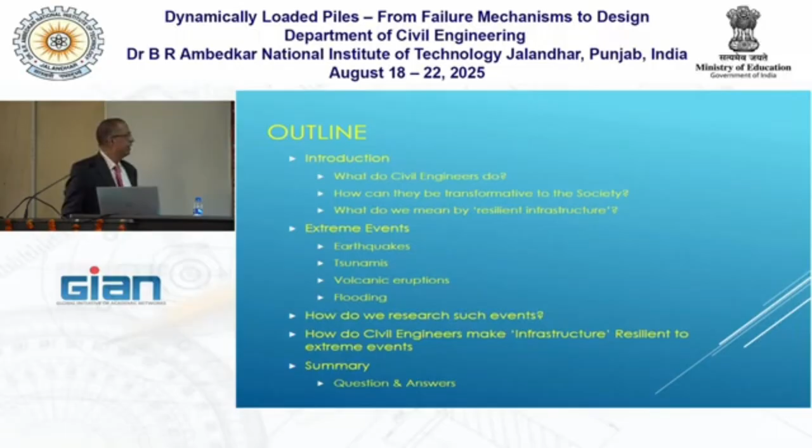And what do we mean by resilient infrastructure? We take the definition of resilient infrastructure as that which can withstand extreme events, for example earthquakes, tsunamis, volcanic eruptions, flooding. And I'll show some examples of each of these.

More importantly, if I want to study these kinds of extreme load events, how do I go about doing research? These are extreme events, so they're not going to happen every day for me to instrument a building and see how it performs or do things like that. So we need to have some research strategy. And once you're able to create that, how do engineers then go about creating some infrastructure that is resilient to these extreme events?

And then I'll try to summarize, and I'll be happy to answer questions. I've been teaching for the last 35 years now, so at any point if you feel unsure what he's on about, put your hand up and ask me. That won't throw me off my lecture, and I can always go back and restart where I left off. So feel free to do that at any point.

Some history. 200 years the Institution of Civil Engineers has been in existence in the UK. In 2018 we celebrated 200 years. Now it's been another 7 years, so it's 207 years to be up to date. There are a few key civil engineers who played a role, who actually never called themselves civil engineers, although they founded the Institution of Civil Engineers.

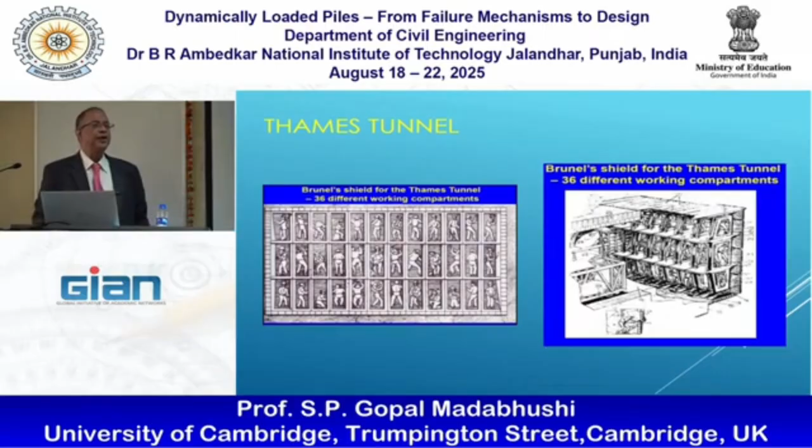Then the tunnel finished, and nobody was using it because they could see the entrance was on the left bank of the River Thames, and the exit was on the other side. So they knew it went through, but they also knew it was going underwater. They thought, oh, this might all leak water at some point and we'll all get drowned. So nobody was using the tunnel.

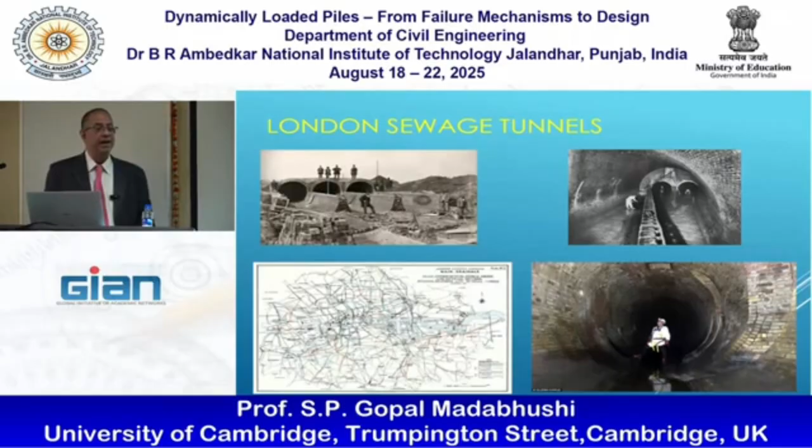Anyhow, this man did the London tunnels. As I said, they're still operational, and the network is quite vast. This is the map of London, where he managed to get the sewer water out of London into the Thames using these tunnels.

So those were the challenges in 1800, right? Old tunnels for transportation of people, water, and sewage. And as a result, London continued to grow, and in fact it's still growing today. About 20% of the UK population lives in and around what we call the Greater London area, that is, 1 in 5 British people lives in London. The rest of the country is only vastly spread out.

In Scotland, which has more than maybe 40% of the land area, the population is something like 6.5 million. So it's really sparsely populated, and it's also very cold up there.

Now our challenges have changed compared to the 1800s. Now we have to do things against the backdrop of climate change, rising water tables, and other risks, some of which I will talk about. So modern civil engineers need to innovate in delivering the solutions that are required today. This infrastructure that we need today is very different from what was needed back in the 1800s.

So I'm going to pick a couple of examples of more recent projects in London again. This one is called Crossrail. Crossrail basically was...

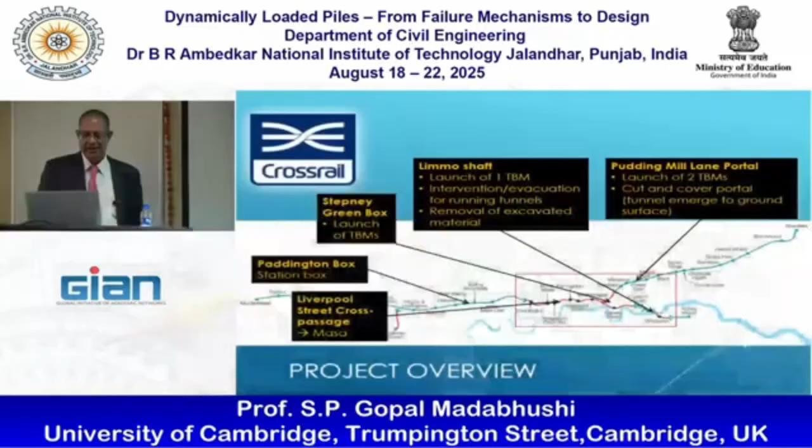So they had some shafts at Bond Street and other places—I'm not going to focus too much on that. This Pudding Mill Lane portal is the important one, and they had to put shafts here. Forget the place names, I'm going to show you.

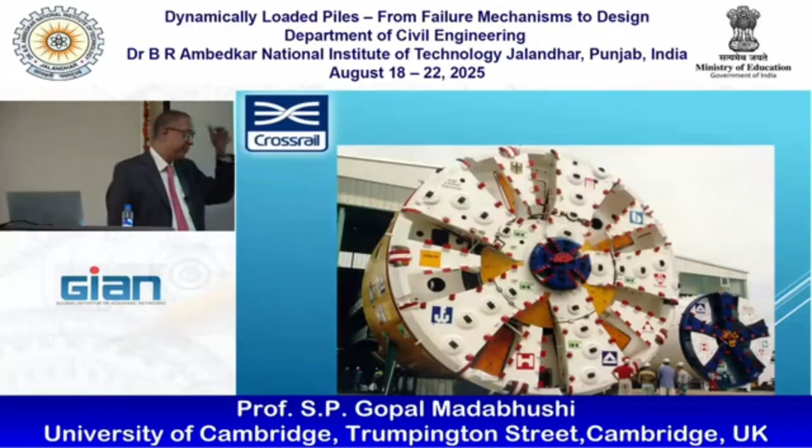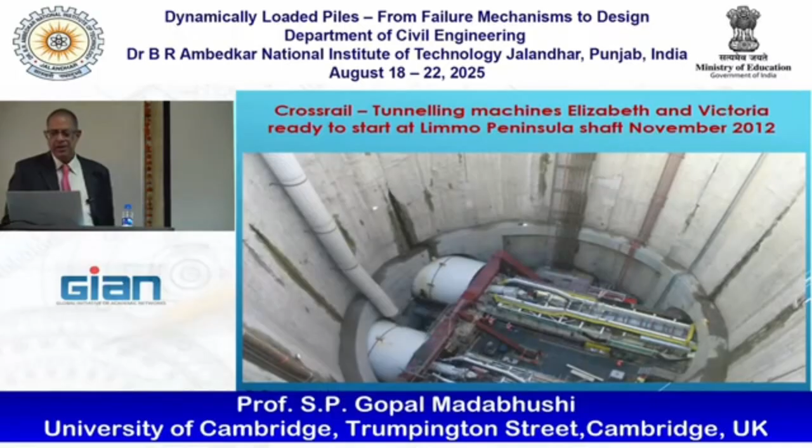So this whole EPB, the earth pressure balancing machine, is a fairly complicated beast, and it needs to be lowered into the ground. You take this and lower it into the shaft, as you can see here, and they land at the base, and then they can start tunneling horizontally to create the tunnel itself. You also line the tunnel as the tunneling machine goes. There are two machines—one is called Elizabeth, the other is called Victoria, which started doing this.

This is a very old slide from my colleague and former professor, Robert Mair, who looked at this tunnel collapse mechanism—I think he did his PhD on it in 1974 or so. As a result of this one slide, he became very famous, started his own company called GCG, and they are the consultants worldwide now for anyone who wants to make a tunnel or has problems with tunnels—they go to GCG in London, which he owns. So this is a very powerful slide; what he put in his PhD thesis made his career lifelong.

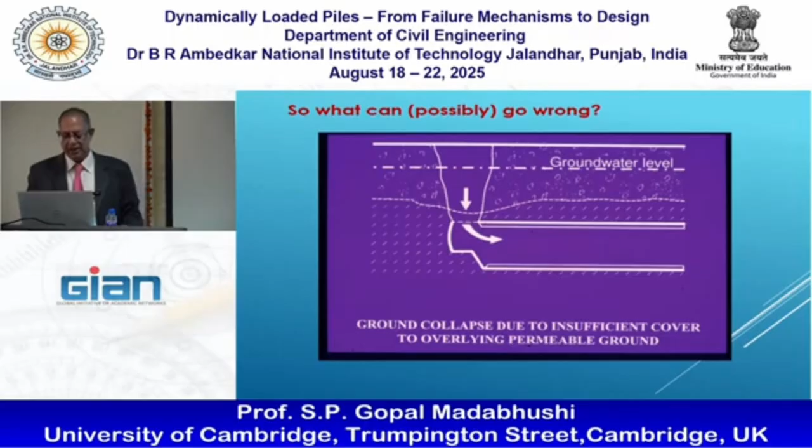So this ground collapse is a very big problem, especially when the tunnel is shallow. Deep tunnels are generally safer than shallow tunnels. And this isn't just an experiment—things like this happen in reality too. This is in Munich, I think, where this kind of sinkhole opened up while a bus was going by. Suddenly the ground opened, and the bus fell in, because they were trying to tunnel underneath, and the whole ground collapsed into the opening the tunnel created.

It's not just limited to the Germans - we have our share of disasters. This tunnel collapse happened when the Heathrow Express line was being built. The only thing that was funny about this tunnel collapse is the porta cabins you see there belong to a company called Balfour Beatty.

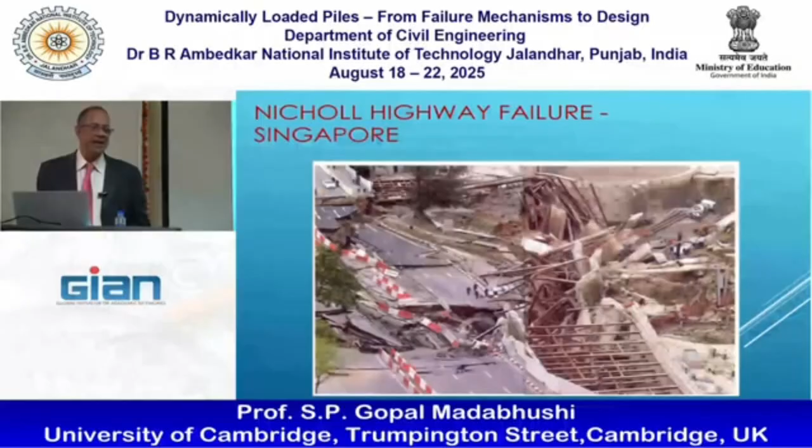Luckily, casualties were less, but Singaporeans are very, very strict about health and safety, so this went up to the highest levels in Singapore government. Robert Mair, the GCG, were consultants looking at the collapse - he was on the committee. But really, if you don't understand the mechanics of the soil properly, things like this can happen.

Okay, those are the bad things. What can we actually do? I'm going to give you an example of the Jubilee line extension, which happened maybe 10, 12 years ago now. And this picture you should recognize - this is Big Ben, and this is our parliament, the British parliament.

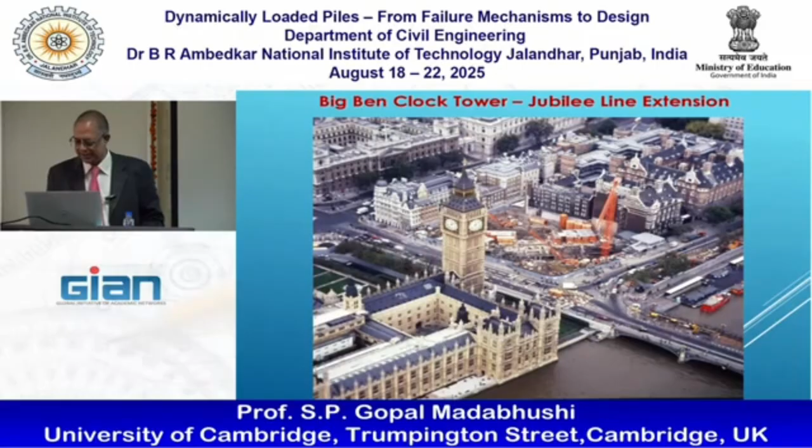So opposite this, they wanted to create a new station - the Jubilee line runs underground below. This is the River Thames, and the line runs in that direction, and the station is just here. If you go now, the construction is obviously finished long ago, but they left the props in place and you can still see them - they made it part of the architecture. Normally you take props off after construction, but in this case they made it part of the design.

So, before they started constructing this, the companies which were in charge of design and build had to sign a contract with their names on it that the settlement...

...tunnel may give Big Ben that Pisa tilt. Everybody knows what the Leaning Tower of Pisa is, and they started publishing this - the Evening Standard, which is a kind of slightly tabloidish newspaper, put that next to Big Ben and said, 'Oh, it's all going to go tilty.'

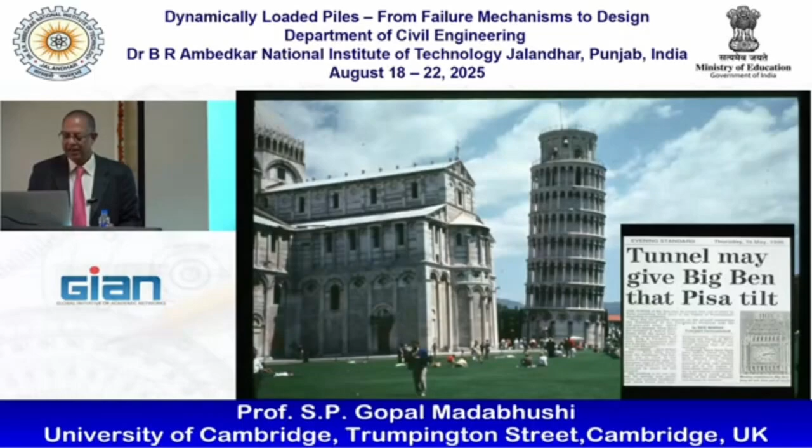What they came up with is this tube a manchette technique, where you make a shallow hole in the ground and inject tubes across and pump grout. The idea is, as they observe the tower, as soon as it starts to show some settlement, you pump grout at high pressure to hold it in place and stiffen up the clay. The actual tunnel goes somewhere below, so you need to inject this grout layer between the tunnel and the structure you're trying to protect. That is the plan.

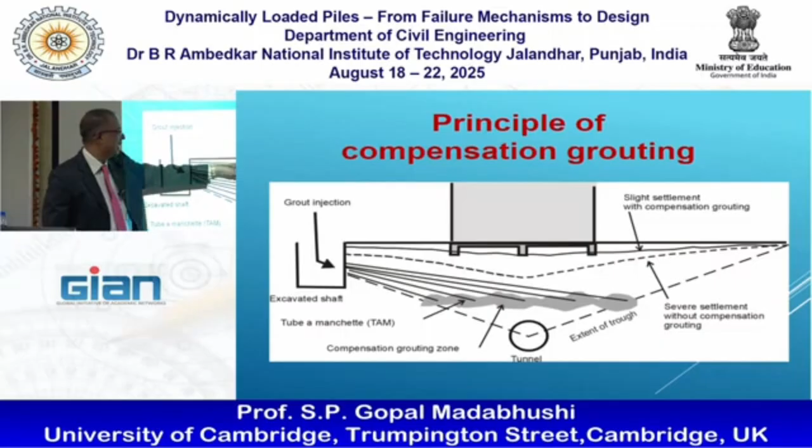And the expected settlement was basically at this level, whereas the severe settlement without any compensation grouting is at this level, and this is not acceptable.

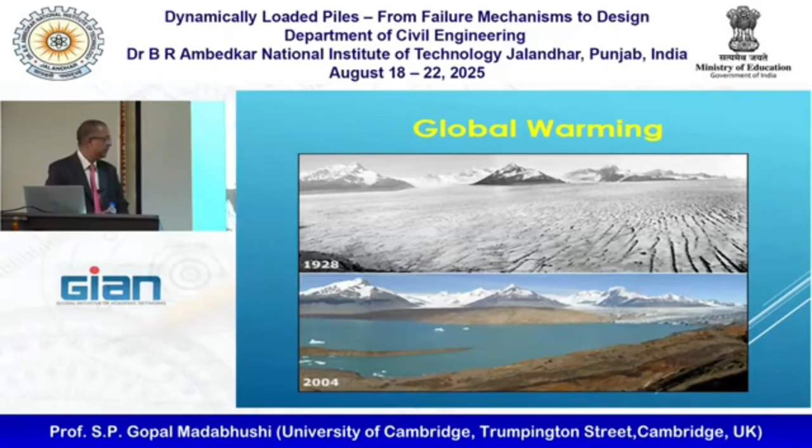You have mining issues like open channel mining, which you can see clearly - things like California mining waste being transported, and so on. So all these are engineering challenges.

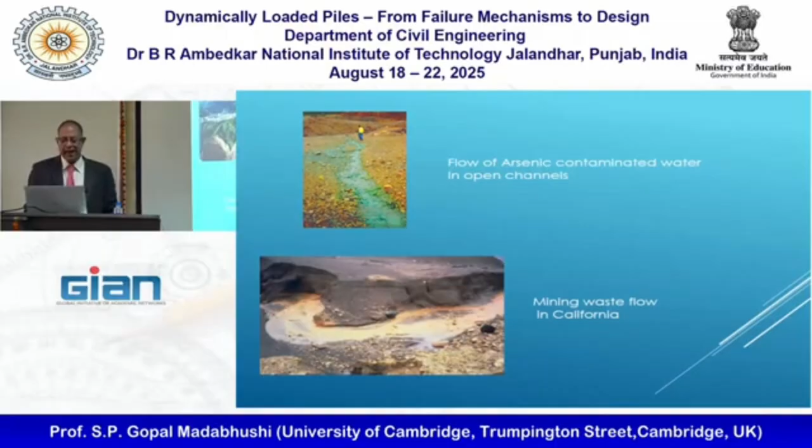And if you think that civil engineers have no role to play anymore because we know how to make concrete, I'm afraid you're sadly mistaken. Because making concrete is not the issue - solving problems is the issue, and problems are continuously changing. That is the main point I wanted to make.

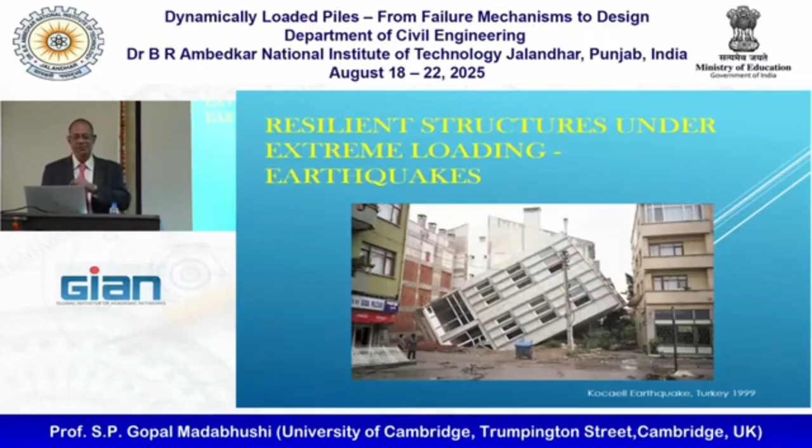Now I move on to a little bit closer to what we will be talking about in this course on resilient structures against earthquakes. This is a building that has perfect structural engineering. Senthil Sab has done a great design. No problem with the structure, right? However, the whole building is now on its side because the foundation has liquefied and the whole thing has fallen. Nobody is going to use the structure. No point how well you make the structure if it is going to be at a 60-degree angle to the ground. So, in the end, the structural engineer will always blame the geotechnical engineer and say you guys don't know what you're doing. And there's some truth in that.

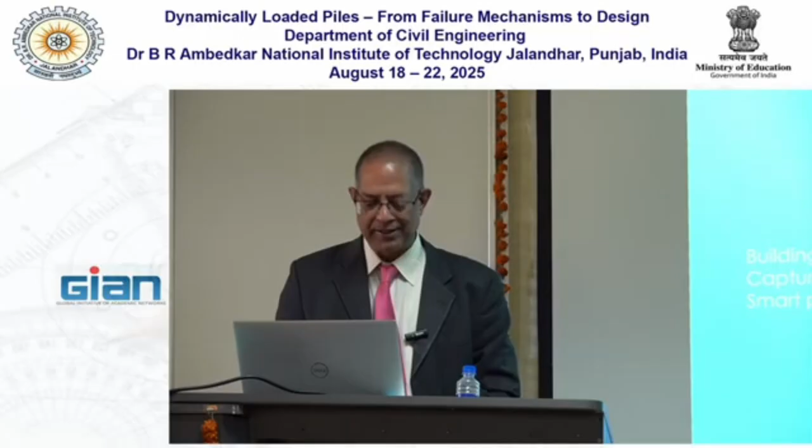I hope this place... now with the advent of, I mean, we used to go on site visits and see things like that, but now so many mobile phones are there, and you get images like this. This is the Mexico City earthquake in 2017. People are still there, feeling the shaking, and the building collapsed right next to them. So now we are getting to see actual failures happening almost in real time.

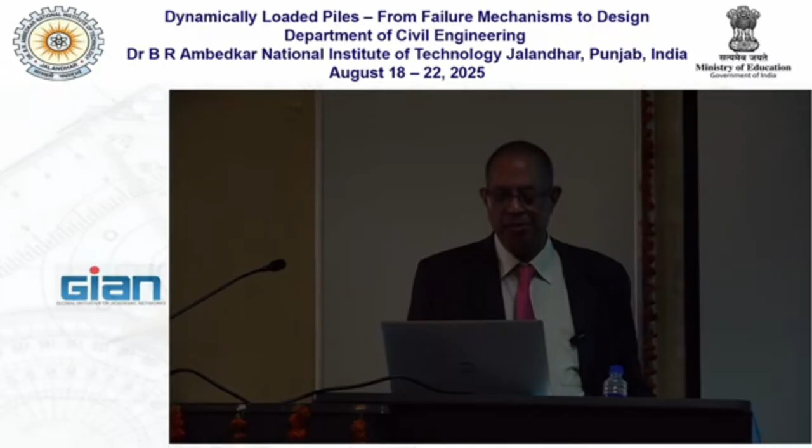Now we'll try to steer you more towards soil liquefaction. I'm going to try and keep it as simple as possible to start with. What is soil liquefaction, right? As an undergraduate, we all would have done this shear box experiment. It's almost the first or second lab you would do in any course.

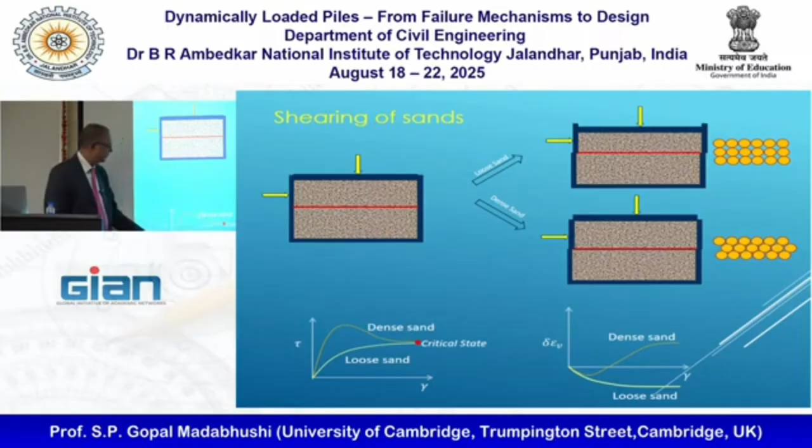Contract, dense and dilate - how does that manifest? If I were to plot the shear stress and shear strain, the dense sand will come to some peak strength and it will strain soften to get to the critical state. The loose sand, on the other hand, will constantly increase in stiffness and reach the same critical state. This critical state is a Cambridge construct, where we say that if you shear anything long enough, or enough shear strain is applied, all soils will reach this magic state called critical state, beyond which you cannot have any more increase in your shear stress. I can keep increasing the strain, both these lines will go horizontal. This is exactly the same as what structures people do in plasticity. Once you've reached your plastic limit, you assume you're not going to get any more increase in strength, only you accumulate more deformation. It's the same concept.

You can also look at this from a volume perspective. This is the volumetric strain, and as I apply the shear strain, dense sand initially contracts a little and then goes up, whereas the loose sand continues to contract. So the dilation is marked positive on that axis. This is very straightforward, and you must have done this kind of experiment before.

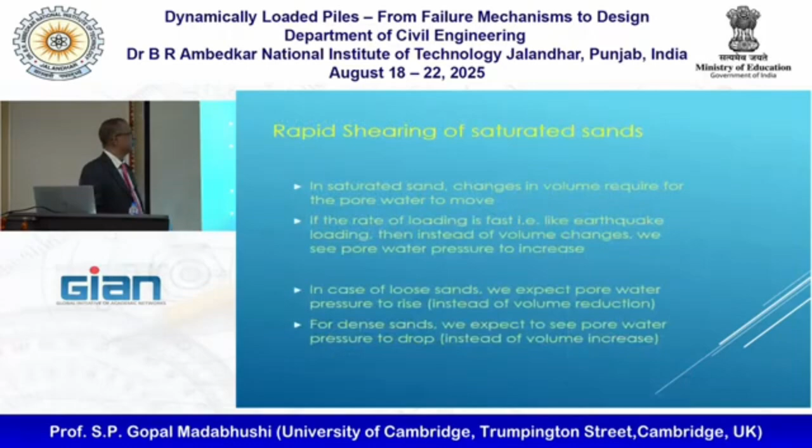What about saturated soils? When you have saturated soils and you're trying to shear them quickly, rapidly, your soil wants to undergo volume change, as we just saw. But for it to undergo volume change, the water between the pores needs to move out. So if I'm reducing my overall volume, the pressure in the pore water goes up, or the water has to flow out to keep the same pressure. If I am dense and I try to shear, the volume wants to increase, which means my pore water must go into suction, right?

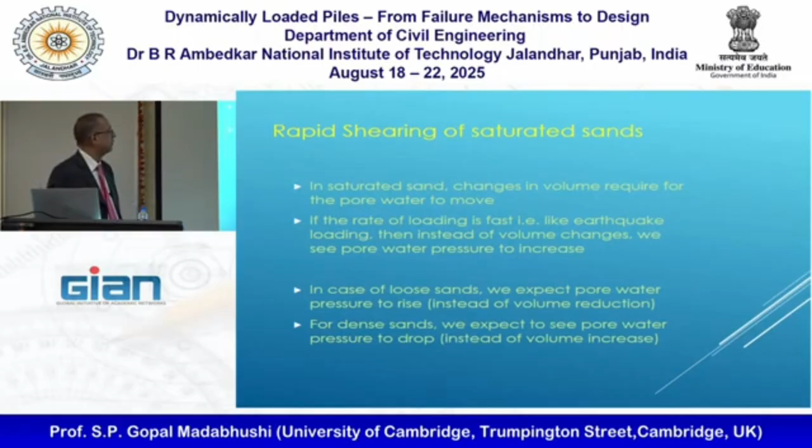So, loose sands, we expect an increase in pore pressure, and for dense sands, you see a drop in pore pressure. Very simple. When you try to do this kind of rapid shearing, I'm choosing rapid shearing because it's like an earthquake type load. You are applying 1 to 5 hertz. If you do that, there is no time for the pore fluid to go out, therefore the pore pressure will change.

Because everything in soil mechanics is linked to effective stress by Terzaghi's effective stress principle, if I change U, I will change my effective stress. If I change my effective stress, I'll change my soil strength, stiffness, the whole caboodle. This intergranular effective stress is the bit that allows you to carry loads, and if you mess around with that, that will change.

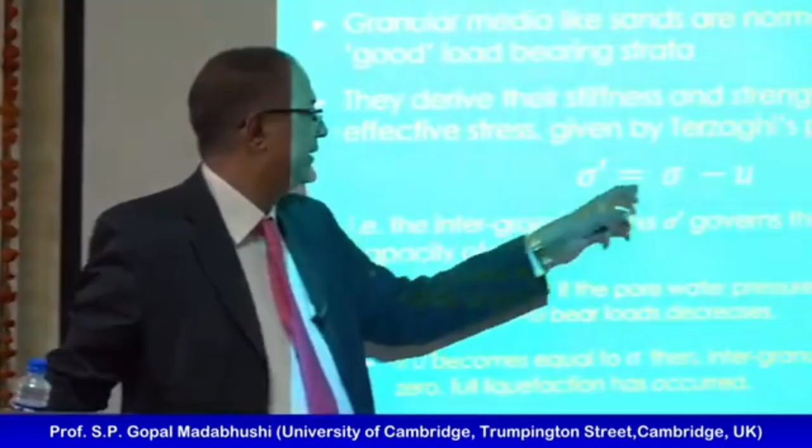So just to apply this, if my pore water pressure goes up, then my effective stress will come down, because the total stress is not changing. So if that number goes up, this comes down, and that's what you would normally call liquefaction. In fact, you can make the pore pressure U go up so much that it matches the total stress. If U equals sigma, then sigma dash is 0. If sigma dash is 0, your soil is no longer soil, it's a soup. You can't make buildings stand on soup, therefore they will sink, rotate and fall down. That's basically what liquefaction is.

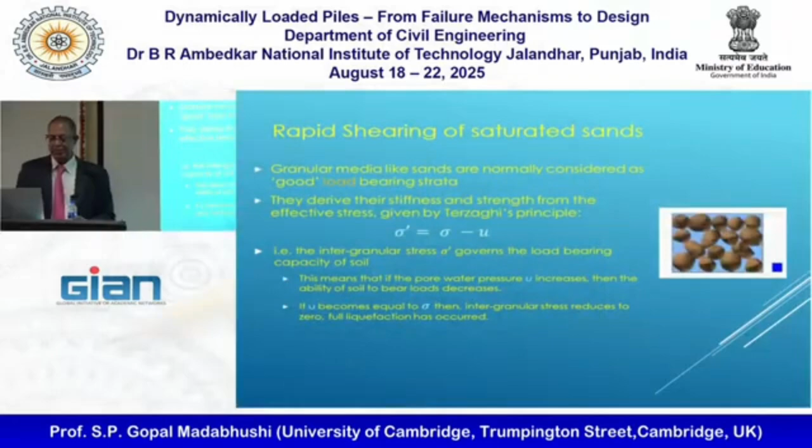If it matches fully, then it's called full liquefaction. If it's say 80% or 90% of sigma, then you would call it partial liquefaction. Both can have their own dangers. We'll come to that later on.

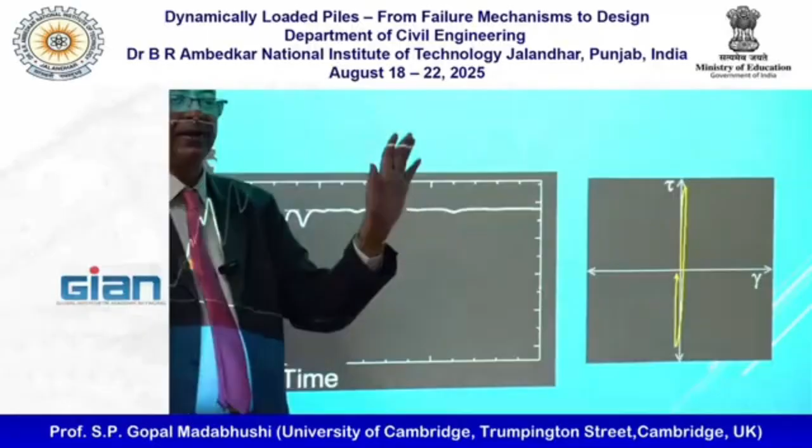So how does this reflect in the change? This is, by the way, from a centrifuge test, so this is actually real data. With time, with the earthquake, the pore pressure builds up. At this point, my stiffness on the tau-gamma plot is quite high. The slope of that loop is my shear modulus, or G, right? Tau versus gamma, dTau over dGamma will be my G. So initially it's very high.

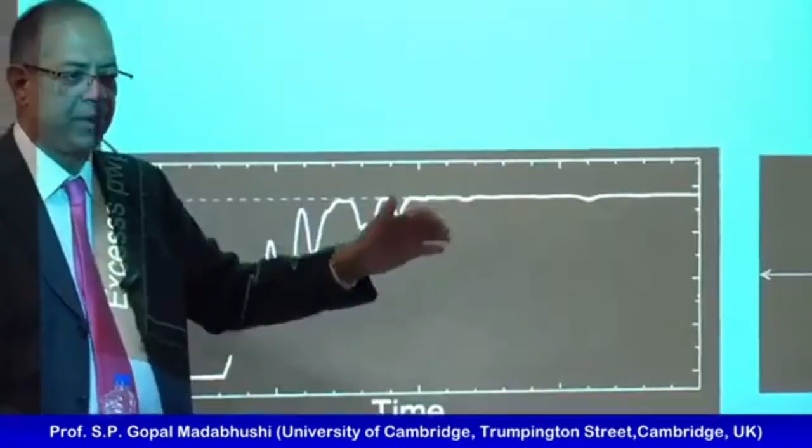So my structure is happy, sitting on top of this stiff material. But as the pore water changes, my loop is now opened up and also rotated. My stiffness has come down. So this is some case of, say, partial liquefaction. If I play it further, now I'm almost close to liquefaction. My loop has now fallen down. I have almost no stiffness, zero stiffness, and therefore my structure will start to sink in.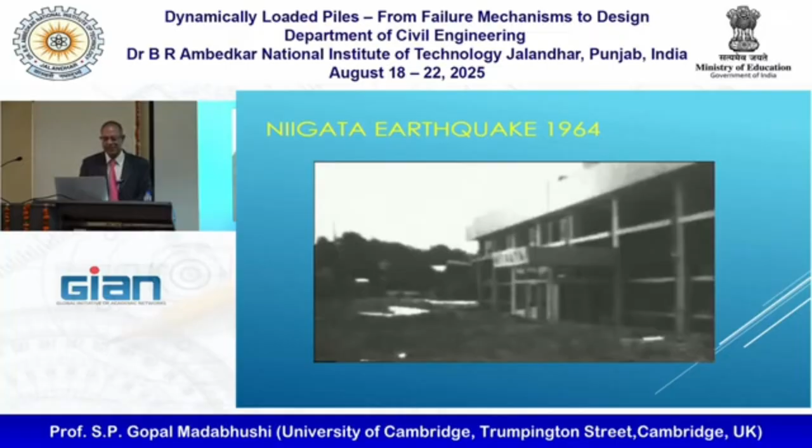And how does that feel? This is the year I was born - me and Professor Agnihotri were born - 1964, Niigata earthquake, and there was this real great Japanese engineer. This earthquake was happening at Niigata airport, and everybody was kind of running away, but this guy decided to take his 8mm film camera and shoot this. This is real good evidence of how liquefaction actually feels in an earthquake. You can see the airplanes and how the water is gushing out, and clearly a lot of settlement because of this. It's real footage of liquefaction from 1964.

As a result of that, this is a very classical picture almost everybody shows around the world - again beautiful structural engineering by Japanese engineers. None of the blocks had a crack in them, not even a crack, but they're all on their backside, and therefore they had to be demolished. This is the problem with liquefaction.

Typically, you would see sand boils like this. Whenever you visit earthquake affected areas, we can tell which bit has liquefied, because you'll always see sand boils like this. There are many consequences of this - for example, buildings can sink and rotate, embankments can move, and so on.

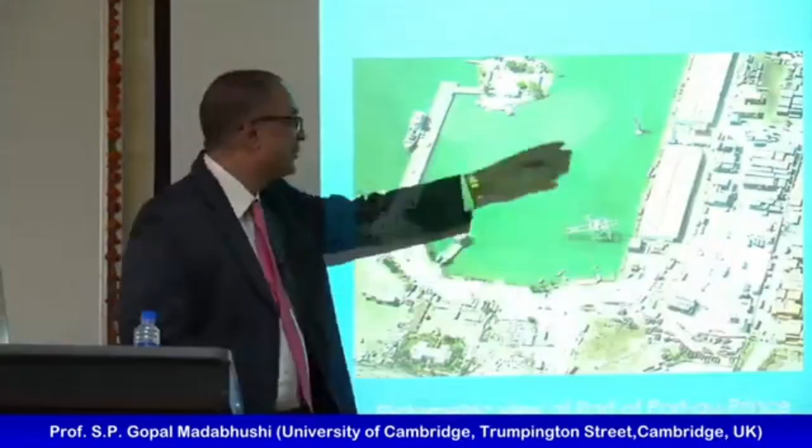Haiti was another example. I showed you some pictures before, but this is now with liquefaction. This is the main port which is supposed to deliver relief goods after the earthquake. As you can see, no engineer would put a gantry crane in the middle of water in the bay, would they? This is where all the ships are supposed to come - you can have one here and one there. The reason is the whole structure that used to support it has fallen down thanks to liquefaction. Therefore, when we showed up, it looked like this is standing in the middle of water, and here you can see there was a lot of lateral spreading.

If liquefaction happens on sloping ground, it will spread. We'll cover that properly later in the course. But if it spreads, you can see these longitudinal cracks developing. I'm standing in one of them. I'm not a short fellow, so it's come up to here, meaning the cracks are about that deep. You can see the ground picture of that crane as well.

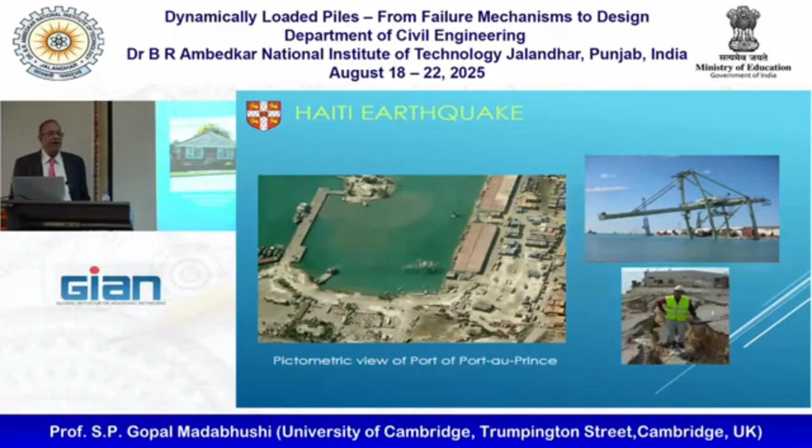These are river embankments next to River Avon in New Zealand, in Christchurch, and you can see the same kind of cracks we've seen before. With lateral spreading, you get these longitudinal cracks. This is from the Muisne earthquake in Ecuador - one of my students went there - and that is from the Bhuj earthquake, picture courtesy of IIT Kanpur.

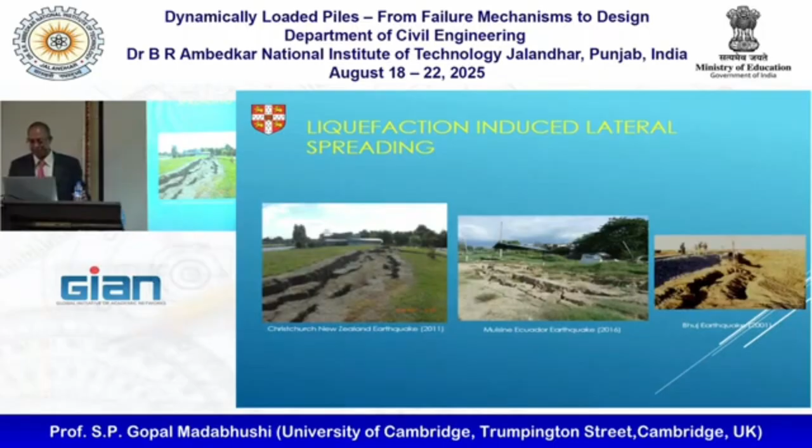Now, if you put pile foundations - first time I'm mentioning pile foundations - into this kind of moving ground, sloping ground which is going for a walk, the piles don't like it because they are standing vertical while the whole ground moves from this side to that side. You can see the whole thing has rotated. I've got a frame on top trying to hold these piles straight, and the piles are being pushed that way, while this one doesn't want to do the same. So at the top of the pile, I get a hinge. Even concrete piles can form plastic hinges, as you can see, by forming spalling of concrete and so on.

So I had one hinge here and one hinge here. The same thing happened in Ecuador as well. These are not big structures, but the mechanism is very clear. Based on this, we came up with this two-pin mechanism where you can have spreading like that and form these hinges. Again, I'll come back to this and do it properly later in the course.

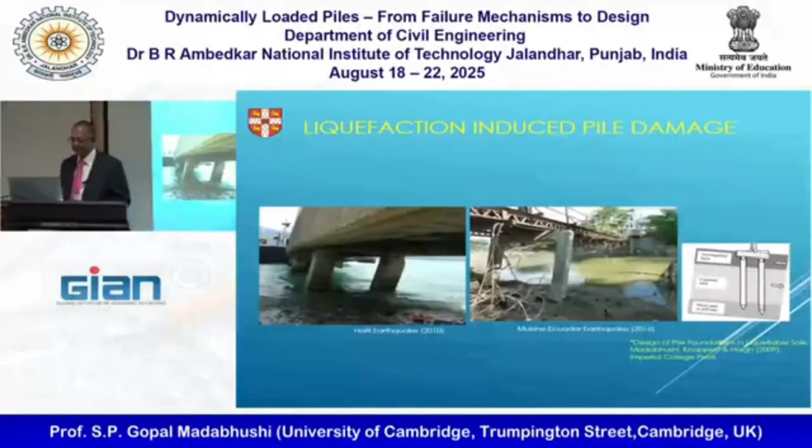One of the more recent earthquakes happened in Sulawesi, Indonesia, and this was another big issue with liquefaction. After the earthquake, this region was looking like this - you've got lots of collapsed buildings. By now we're used to seeing collapsed buildings, but what we're not used to seeing is roads getting crumpled up like this.

Maybe in parts of Andhra the roads are already like this, even without the earthquake - but that's just for us to worry about. These roads were fine the day before, and they turned up like this, with buildings collapsed on both sides.

You won't see what caused this until you go to air. Once you start looking at aerial pictures, you start seeing this kind of damage. This is the one I want you to take - stitched up satellite images by a company, and I'll play this for you, and you can see what happens.

So those are actually stitched up based on satellite images, forgive the dramatic music. But the before and after is quite clear to see - this is how it looked before, and that's how it looks after the earthquake. This is all because the ground liquefied and started moving like a river, as you've seen. Nothing makes the point better than a good visual.

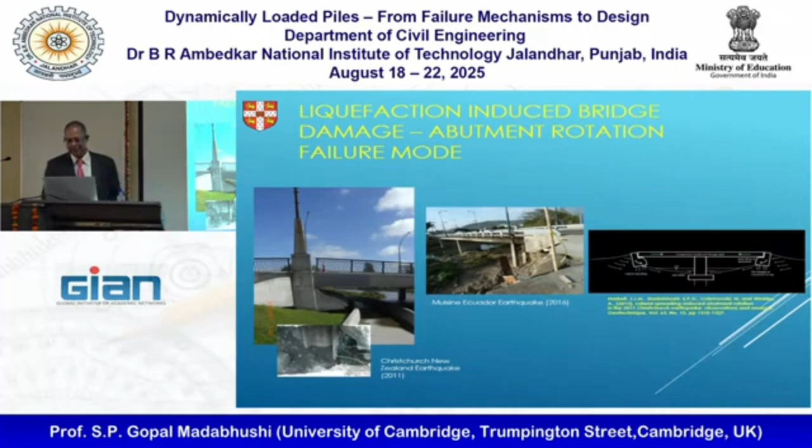Similar things with pile foundations we saw in Christchurch, where the moving ground - whether steel piles, concrete piles, or solid square piles - all were forming hinges on top, and you can see the whole thing got rotated because the ground was moving into the river. I can show you many examples. In fact, there are publications in Geotechnique if you're interested, where you can look at the new mechanism we were proposing based on that.

Another thing that can happen is if you have tanks below ground and the soil liquefies, these tanks want to float up. If they're below ground, the weight of the soil is keeping them down. If the ground all turns into liquid, even temporarily, these want to float up, especially empty water tanks, oil tanks, and so on, and many times they do.

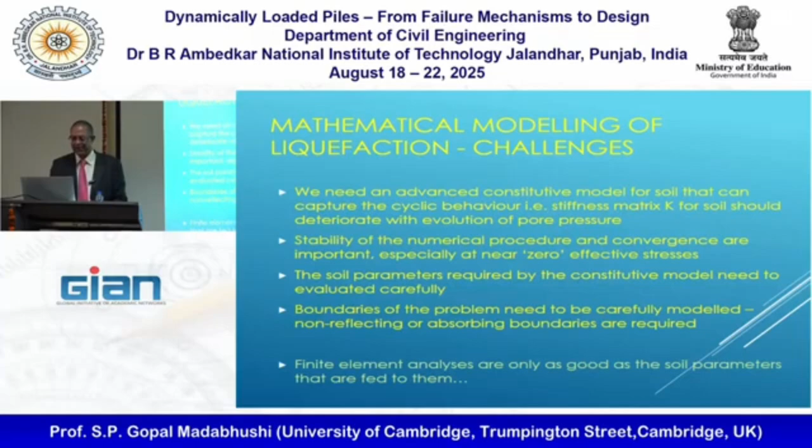But the constitutive model is the big thing for us. We had a code called SWANDYNE, which I used for many years, and we were, for fun, playing games with this. Here is the Kobe earthquake which created this kind of gravity wall movement. It moved and settled. Somebody just did a centrifuge test on that, and I did the numerical analysis.

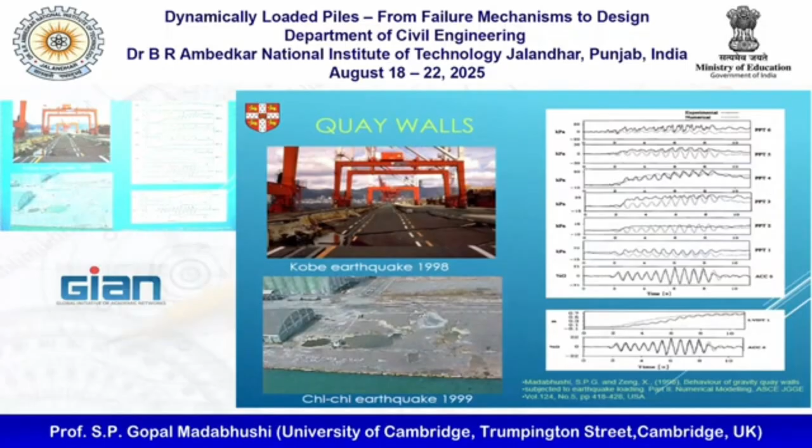Analysis of this. One of the funny things is that when you shake the tunnel, it pops out because the soil liquefies.

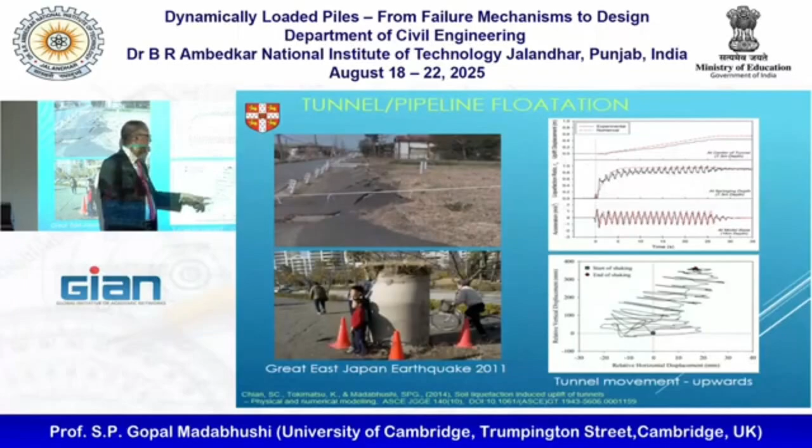Here is the input acceleration and here is the increase in pore pressure. But the displacement, if you plot x versus y, the tunnel or the pipeline does that. So it's shaking horizontally while moving up, and that's why you are seeing these oscillations. While it started there, it ended up here, some movement of nearly half a meter, but it is not going in one step, it is going in stages.

So to do this kind of thing, we had to go with a rectangular tunnel. This paper is, by the way, published in the Indian Geotechnical Journal, and me and my son, during his holidays, ran this analysis, and it came out good, so we thought we should write a paper on this.

We gave it a sinusoidal motion and saw what's happening to the accelerations. Those are all reducing, pore pressures increase, and the tunnel moves there. I should have an animation of this.

So the bottom is where you are seeing the current time, and the pore water pressure is shown by the color, and the tunnel location is shown. Oops, why do you do that?

As you go through this, as the earthquake hits, the pore pressure builds up and it's almost fully liquefied, RU of 1, and you can see the tunnel move up. As it tries to move up, the question was, of course it's going to move up, it's lighter than the soil. Why would it not move? It will move, but what stops it? Why is it not floating all the way to the surface?

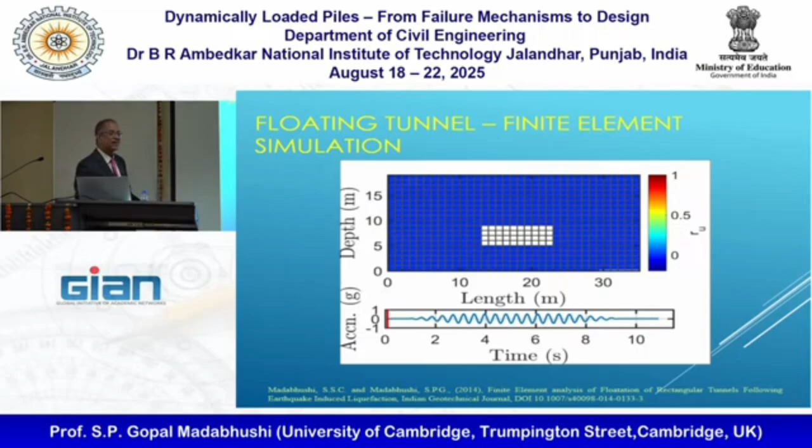Surcharge is effective stress is 0, right? So there's nothing to stop it. As it tries to move up, you can see in the pore water, it has to create some suction. It's that suction that is holding it down.

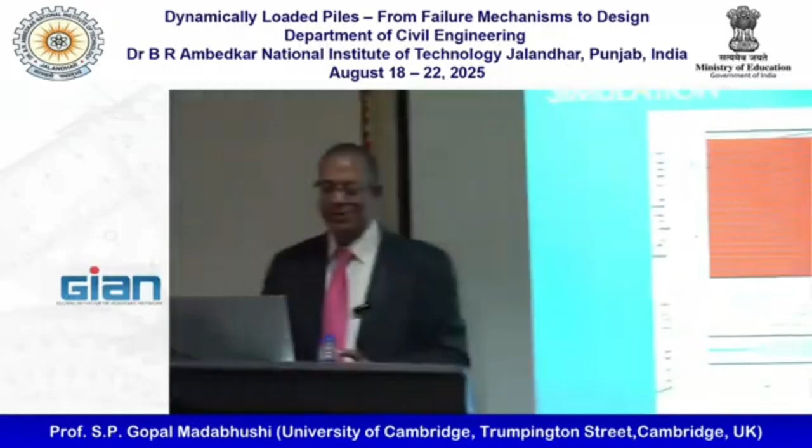And this was just numerical, right? My son just graduated, so I didn't believe him and he didn't believe me. We thought this is what we will say. If you read the paper, that's what it says. We have no experimental evidence, but this is what computer analysis is showing. Now I have a PhD student who's actually done centrifuge tests and showed this is what happens. But this came 2 years ago. This paper was published back in 2014.

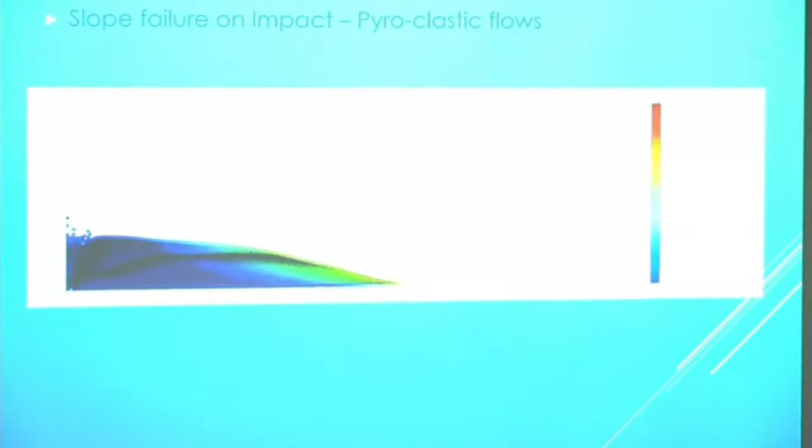So that finite element analysis is one way of doing it. Another method that's come more recently is this MPM method, material point method simulations. There's a code called Anura 3D, and this is good for some large displacement problems. For example, if I have a slope like this and let it fail, it will go like that. This kind of works on change of momentum equations, which is why it initially does some bad things that are not physical. But the runout distance and the final slope seem to work okay.

This is very much a new method. People don't know too much about it, so people are trying it for different problems. This is done by a colleague of mine, and now he's a professor at UT Austin.

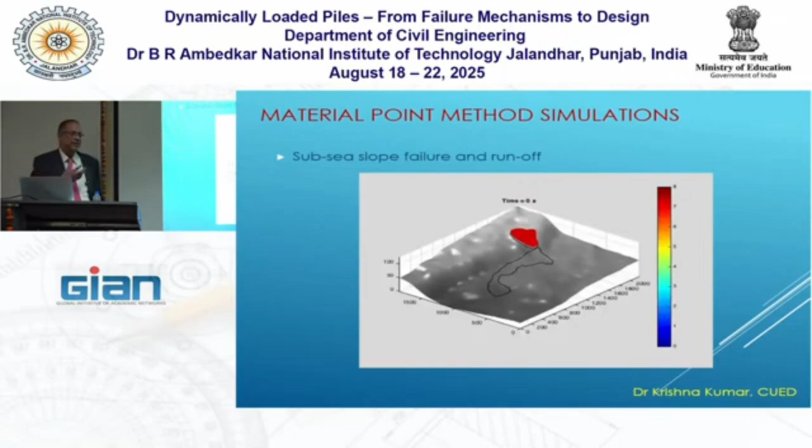They also try this for a very important problem of subsea slope failures. There are some classical examples around Norway and Japan, where subsea slope failures cause the soil to run for kilometers. Once they start going, they don't stop. So this is a bit like our lateral spreading, but the spreading happens over the lengths of kilometers. You can see that is nearly 2 kilometers, and the width is about 2 kilometers also.

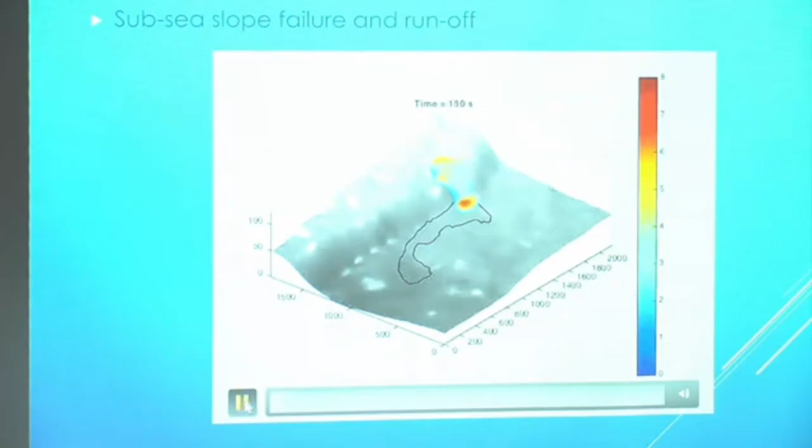Let's see what the analysis predicts. This is what the underwater survey revealed, this is the historic slope failure, and they created an analysis of this. Depending on the topography, that's what the computer is predicting. Clearly under predicting, but it's not too bad for something you're trying to do.

Okay, I'll try and do this quickly, but tomorrow or some time I will come back and we will go through the principles of this. It's actually not that hard. Imagine I can have a small scale model of a real problem. So if I have a dam of 100 meters high, in the lab I can't build a 100-meter high dam, but I can certainly build a meter high dam.

So I build a 1 meter high dam in the lab and put it on the centrifuge and spin it at 100 times Earth's gravity. So the soil underneath the dam will think that it is actually below the big dam. That is basically what centrifuge modeling is. You scale down the model and increase the gravity by the same factor. Our centrifuge is about 10 meters in diameter, and it can carry 1 ton of soil up to 150 times the Earth's gravity.

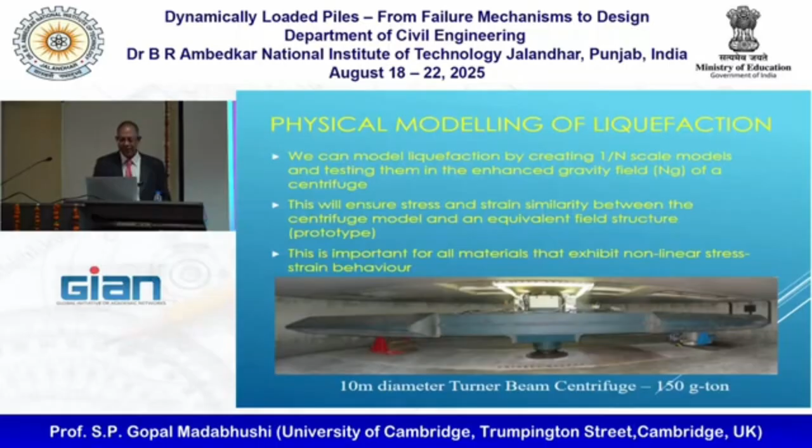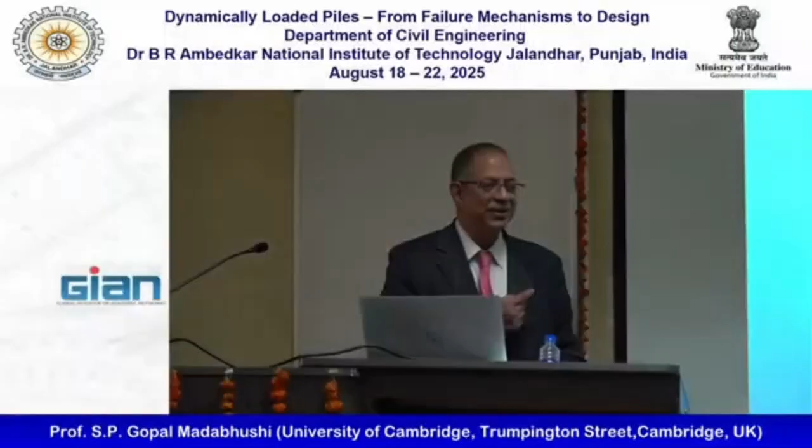We can also shake, and this is what my specialization is. There are some issues - we want to mimic earthquakes in a centrifuge, but because of the scaling laws, which I'll explain tomorrow, we need to apply big forces in very short time, which means I need quite a lot of power in my actuator. We must also be able to simulate earthquakes.

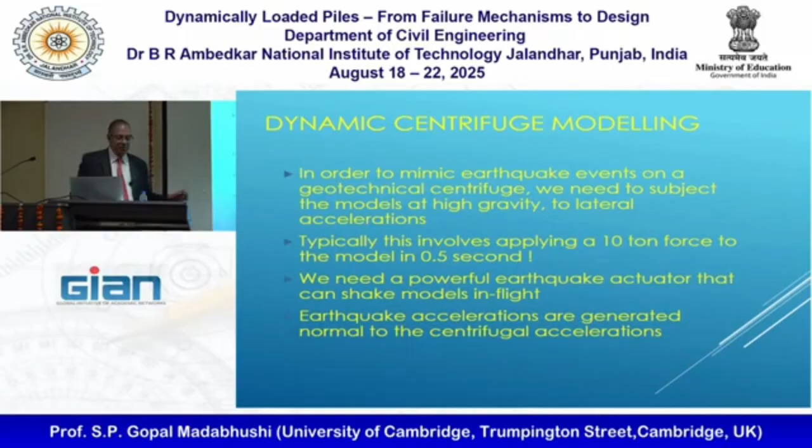So the first one I built was this SAM actuator, and this is cheap and cheerful. The whole thing cost less than 20,000 pounds to build, and we made it in-house. It can go on the centrifuge, you can put a package on it. All it is, is a motor and a flywheel.

I store the energy into the flywheels, and there's a fast-acting clutch which will grab onto the reciprocating rod and shake this. That's all it is, a very simple thing to do. And this was very successful. We worked for 10, 15 years and produced maybe 12, 13 PhDs for me. So it's done quite well.

And it will usually produce earthquakes like this. It can only do sinusoidal motion or swept sine wave motion, very clean earthquake at one frequency. That's what it could do.

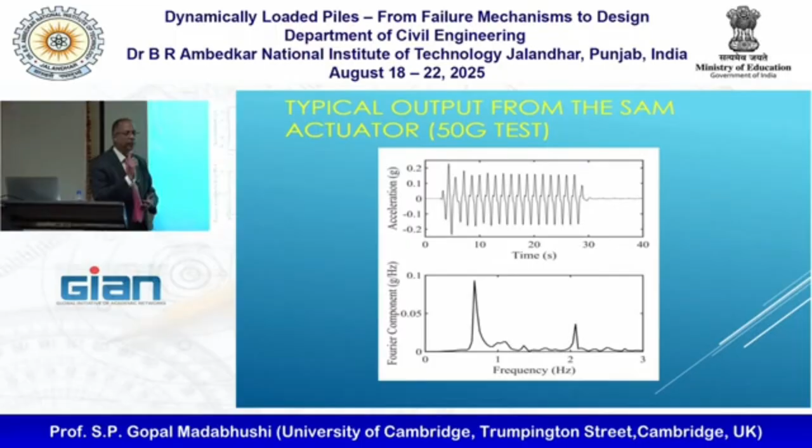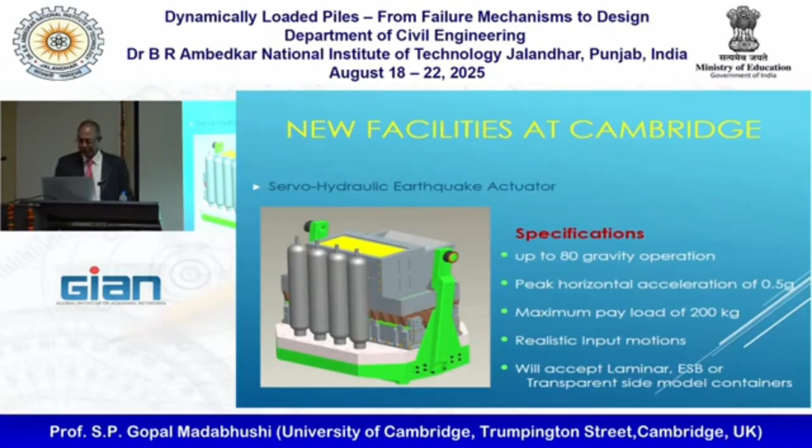This one has specifications like it can work out 80 times Earth's gravity, it can apply earthquake of 0.5 G, carry about 200 kilos of payload, and the most important thing is it can simulate realistic earthquake motions, not just sine waves. And it can accept all our existing containers as well. So that was our shaker.

And then we put it on the centrifuge and place the table, the model container with just a level bed. It's a trial experiment we were doing.

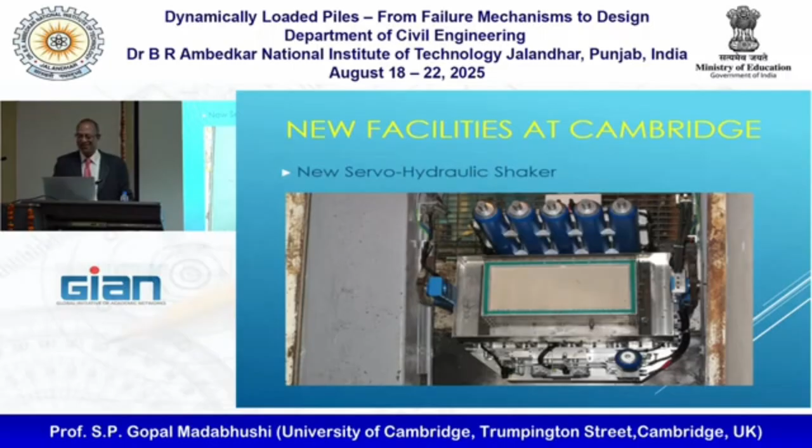And then we all get very nervous because those cylinders hold oil at about 300 bar pressure. And once the centrifuge starts rotating, they're traveling at about 200 miles an hour. So there's a lot of pressure, not just in the cylinders, but also in us. You can see it in our faces. And then you kind of hope for the best and press the button, and it does the earthquake.

I will talk about applications on piles tomorrow, but here is something fun I'd like to do, which is this program commissioned by BBC. By the way, this program is available on YouTube. You can all go, and if you type in ancient apocalypses, Sodom and Gomorrah events, you will see the whole episode.

Basically, there was a geologist from Canada who said that these two cities, which are mentioned in the Old Testament, disappeared because of an earthquake. It wasn't the hand of God or anything like that, because the Bible says those two cities were sinful and therefore got punished by God. This guy said, no, no, it was a big earthquake that can happen in that part of the Dead Sea. There, it caused liquefaction and these whole cities disappeared. And these were all 4,500 years ago.

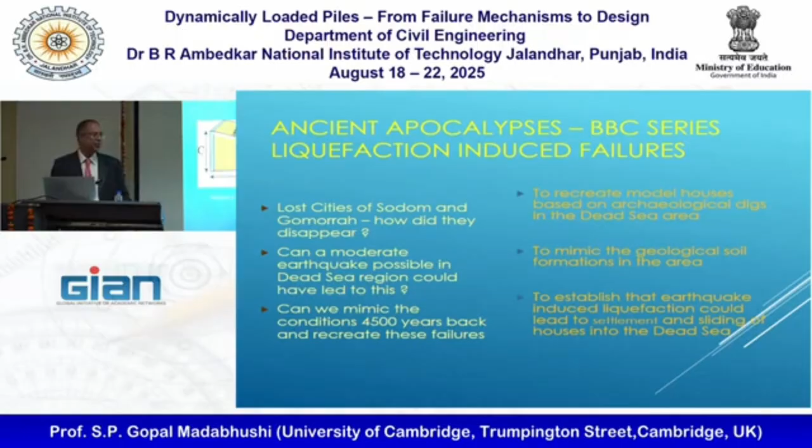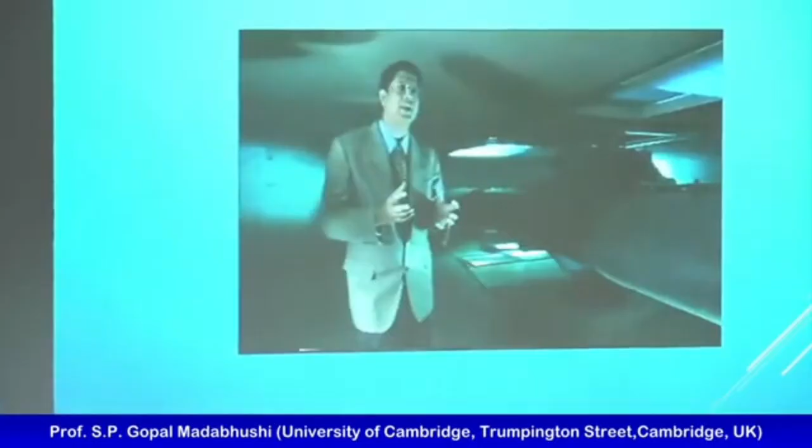This is the clip of Sodom and Gomorrah. The idea is to see whether, if there is a medium strength earthquake, is it possible for these villages to have actually disappeared?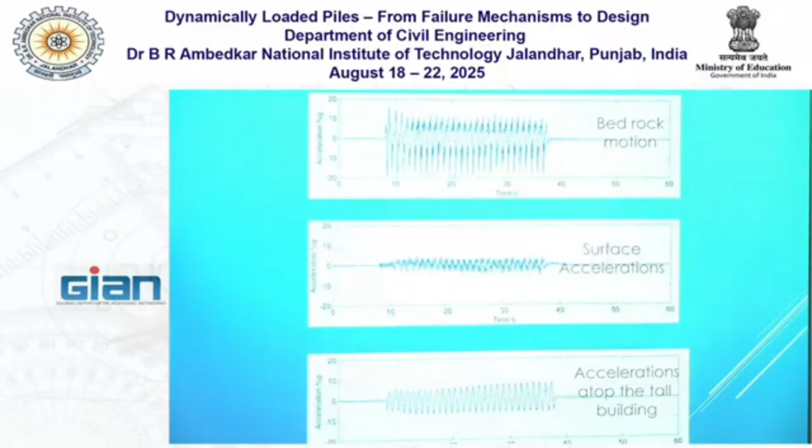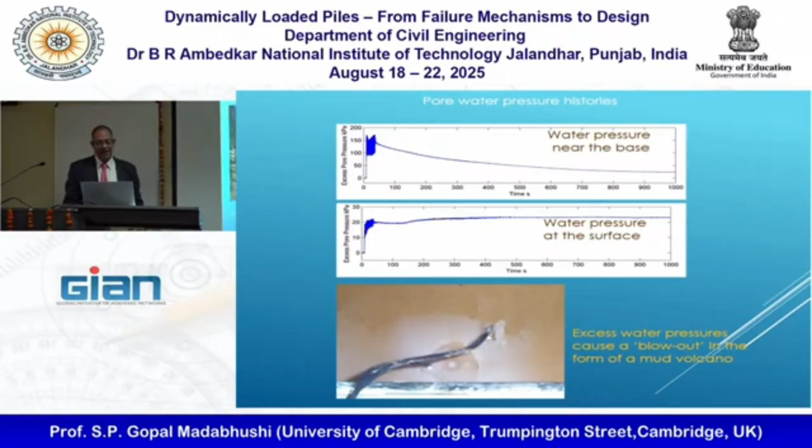I think that's, yeah, you can see the whole program later on, but basically that's how a centrifuge test works. And what we get is data from it like this, where we can measure the accelerations on the soil and also on the buildings, and what the pore pressures have done during the earthquake. You can see the liquefaction, and the rock flour that was deposited earlier came and formed these sand boils on the surface. As I said, they always indicate liquefaction when that happens, even without the instruments. And okay, we got the pre and post pictures of the model village and so on.

And we give this back to BBC. One of the things they're very good at is creating this kind of visualization based on what was given to them. So they thought this is how it happened.

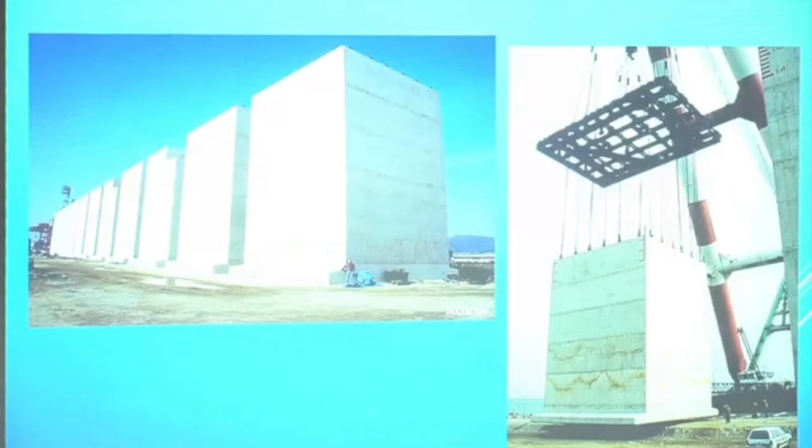So that's a good example of what lateral spreading can cause, and some of the fun things you can do, even going historically.

Now, the last bit I wanted to say is about protecting against sea levels. This is the kind of seawall defense people are now constructing. This is in California, and that's a person to scale, so you can see how big these are. They're a good 20-25 meters high.

So this Japanese company called Giken have come up with a dual wall concept, where you have two walls that are tied at the top. I'm going to go quickly.

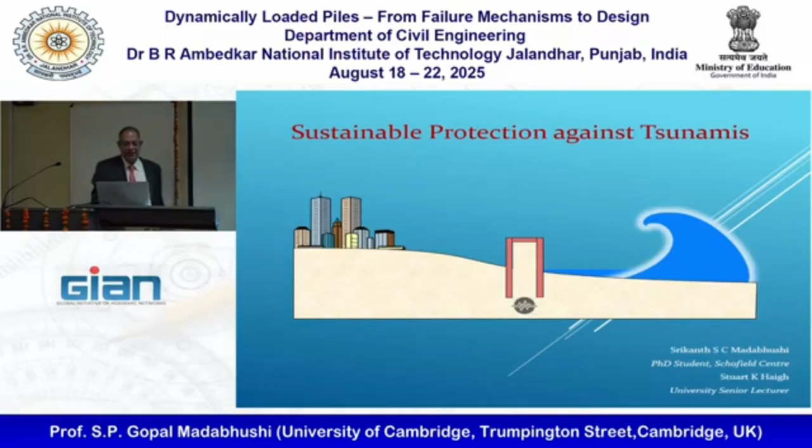You all heard of the Sendai earthquake and how the existing tsunami walls got overtopped there, creating boats ending up on top of houses and all kinds of things. Obviously you don't want boats on top of buildings, right? So that happened as a consequence of the tsunami.

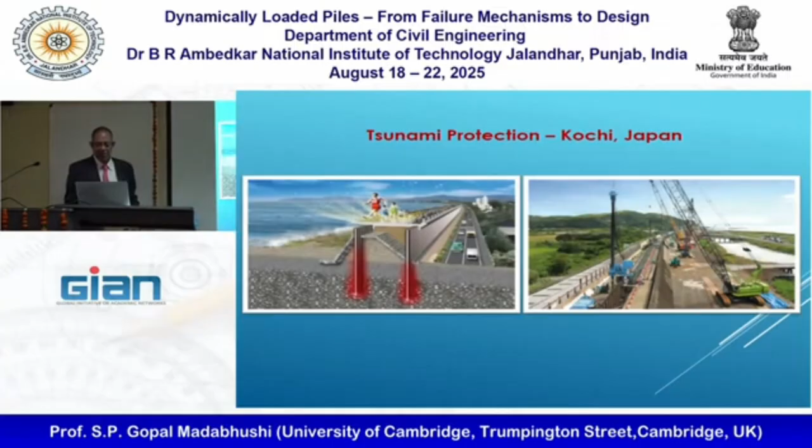So this company wants to put sheet pile walls next to one another and tie them at the top. In fact, they're doing this in a place called Kochi in Japan, all along the coastline. But again, you want to see how well they work.

So you could do this numerically. There's also experimental data that has been done. And you can see that when you shake this, the soil on either side of the wall liquefied, but the soil inside hasn't liquefied. In fact, it's going into tension.

Why? Because these walls are tied at the top, which means when the soil liquefies, the walls want to splay. If it wants to splay, the soil inside says, no, you can't, I'm here, I'm going to go into suction. And that is what holds it together.

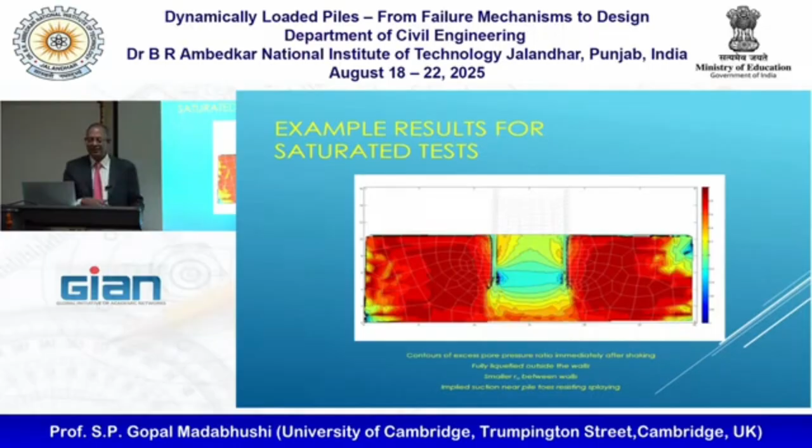Exactly the same way as the tunnel: if it wants to float, the suction underneath is what stops it. So the link between how soil behaves and how pore water pressure is generated is critical in problems like this. That tells you whether the thing is going to work or not.

Okay, I'm going to stop there. I hope, although we haven't touched so much on pile foundations, at least you got an idea of why we do research in this area. It's very interesting to start with. You saw we are dealing with problems of current construction, past construction, modeling historical events, all kinds of fun stuff you can do.

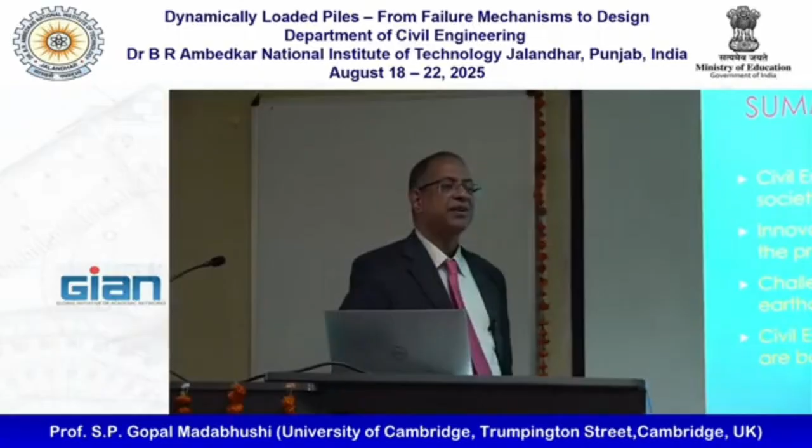And that's only possible because we have the time and good students to sit down and think about things. Equipment, finite element codes, all these are secondary in my opinion. What we need is some thought that goes in before you start your PhDs or masters or whatever. And if you do that, you'll enjoy it a lot more. And if you enjoy it, the results will follow. If you start the other way around, saying, if I do this, what job will I get, the answer will always be, no matter what you do, you'll get a software job.

Then you don't have any interest in what you're doing, because you'll end up typing C or C++ code until AI starts writing faster than you can, then you're out of a job. So don't go that route. Enjoy the problem you're trying to solve, and do the best you can for that particular problem.

And then you need not be told. Your supervisor or guide didn't tell you to do the work. You will do it yourself because the problem drives you, because you want to find a solution. We are humans. We are inquisitive.

Okay, that's about it. A lot of acknowledgements, obviously, for putting a presentation like this together. A lot of PhD students have worked with me. A lot of funders funded me. A lot of my colleagues helped over the years, and so on.

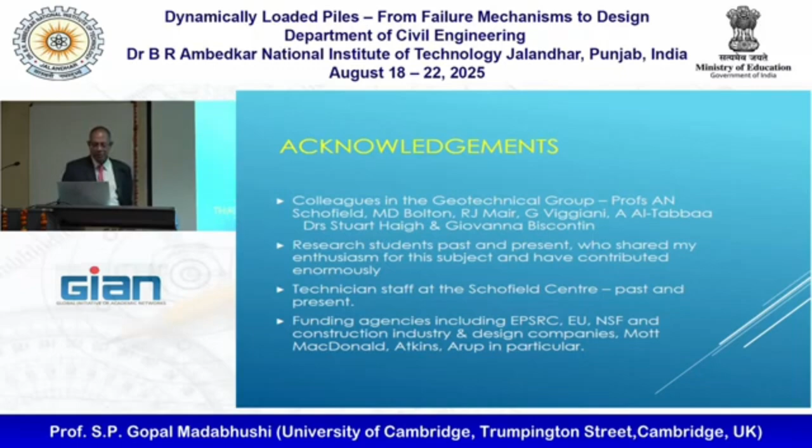The next lecture I have is on more static topics, and we'll now start going into pile foundations.

So, what shall we do, sir? Shall we have a 5-minute break, or what time is lunch?